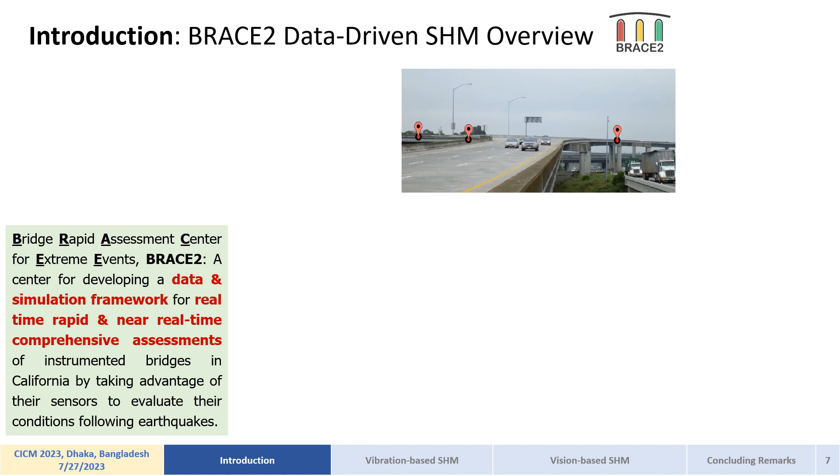BRACE2 is a Bridge Rapid Assessment Center for Extreme Events to develop a data and simulation framework for real-time rapid and near real-time comprehensive assessments of instrumented bridges in California by taking advantage of their sensors to evaluate their conditions following earthquakes. Sensors are typically accelerometers for vibration-based SHM and cameras or drones for

vision-based SHM. Upon processing, learning, and analyzing the multimodal data, where we couple physical twin with digital twin through sensor data, system identification, finite element simulation, we achieve rapid or detailed maintenance decisions.

Forming BRACE2 is motivated by the fact that in the past 20 years, about $25 million were invested by Caltrans in the California Strong Motion Instrumentation Program for bridges. BRACE2 will demonstrate that such instrumentation can evaluate the bridge conditions and help the mission of the maintenance and post-earthquake investigation team. The map shows the stations of Caltrans CSMIP on bridges.

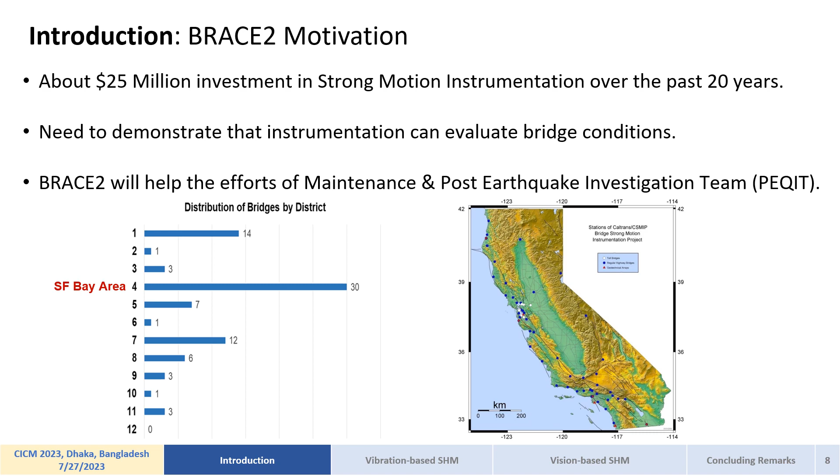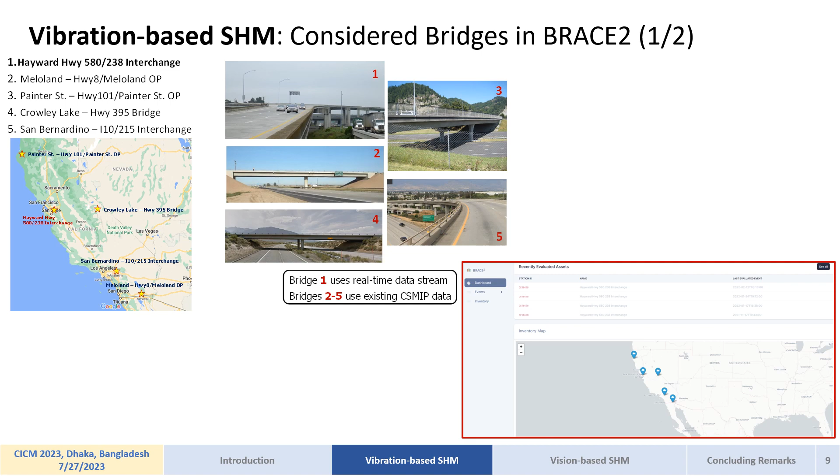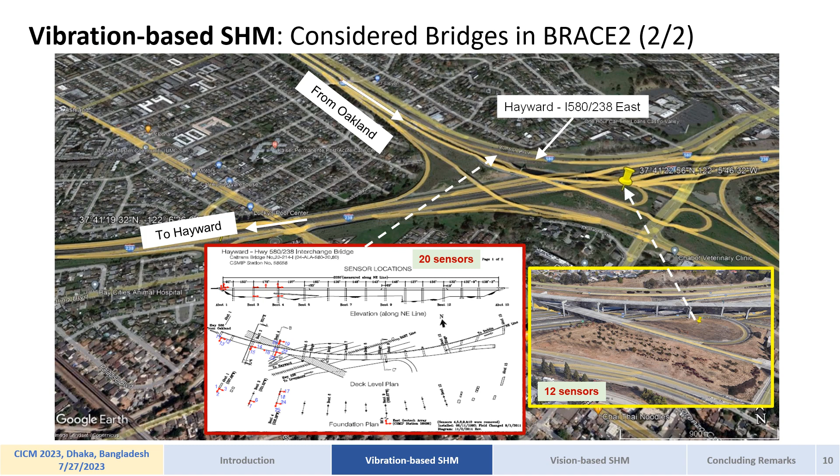about this platform. The Hayward Bridge is shown in this slide, which has 32 channels of recording, 20 on the superstructure and 12 on the East Geotechnical Array.

On a high level, the BRACE2 platform consists of a decision-making core. It receives data from the 32 channels of accelerometers through California Geological Survey real-time data streaming to the BRACE2 server for the case of Hayward Bridge.

It also has several pre-developed structural components to determine the capacity of these components, which are used for real-time damage assessment. It also has global bridge models of multi-fidelity for near real-time comprehensive assessment.

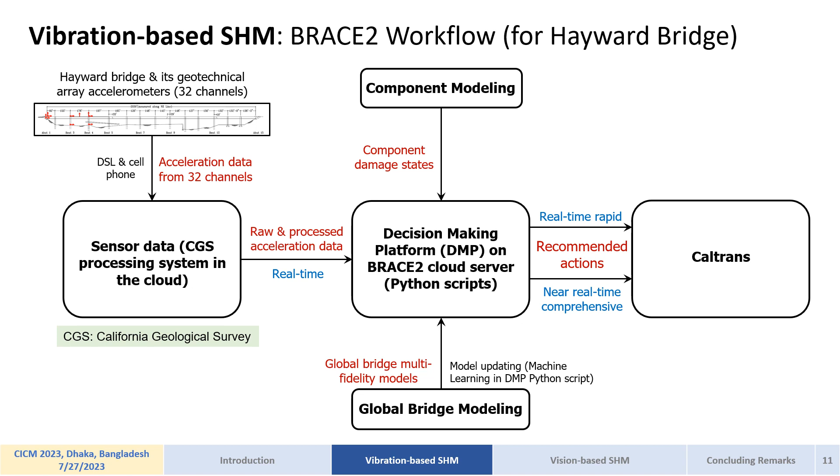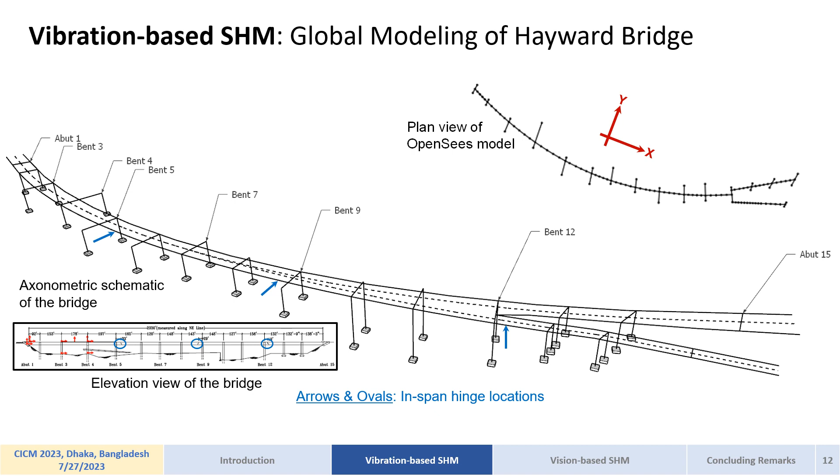This slide shows the computational model of the Hayward Bridge, which is developed in OpenSees and considers all the details of the model, including in-span hinges, abutment models, different constitutive models of columns, the bridge deck, and so on.

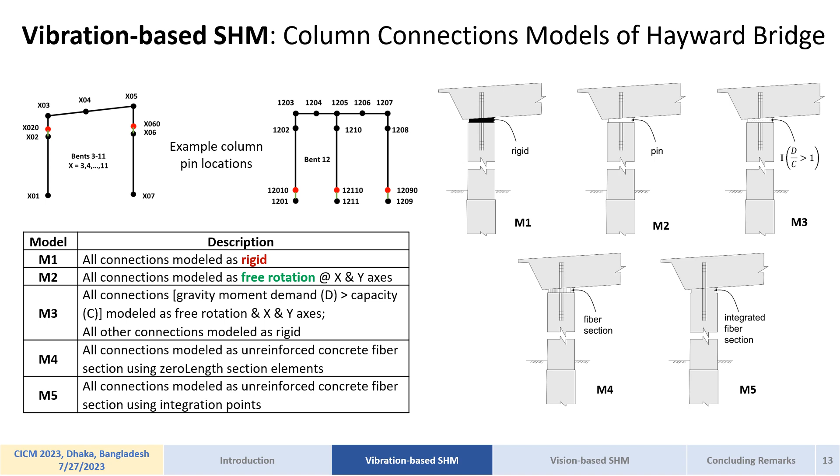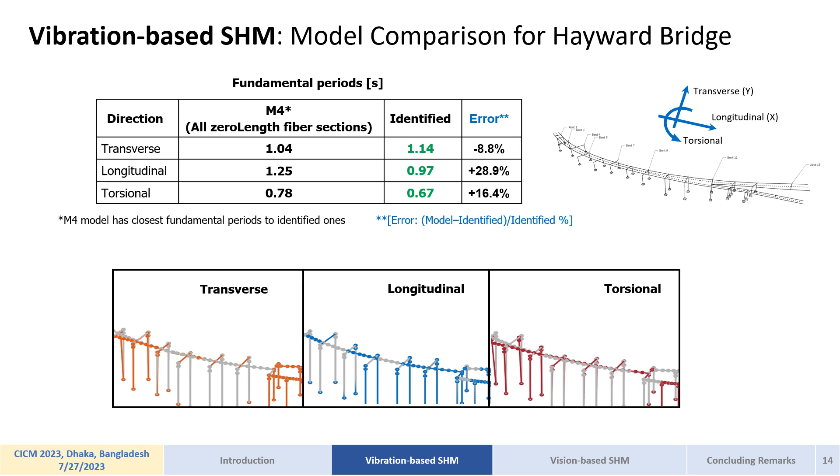Several system identification methods are implemented in the BRACE2 framework, including single input, single output, multi-input, multi-output methods, where acceleration data, recorded for the instrumented part of the bridge or simulated for the non-instrumented part of the bridge, are processed to estimate the vibration characteristics.

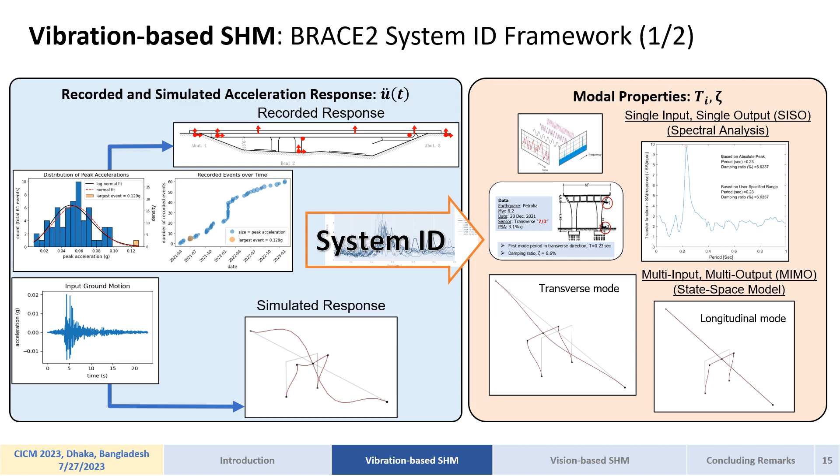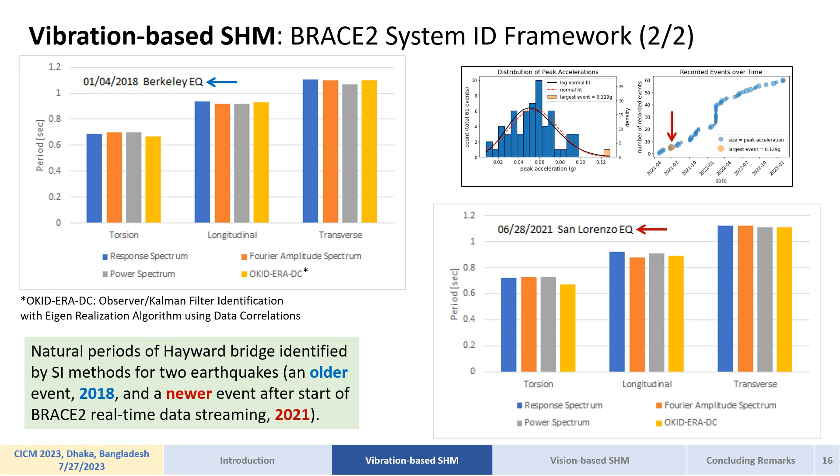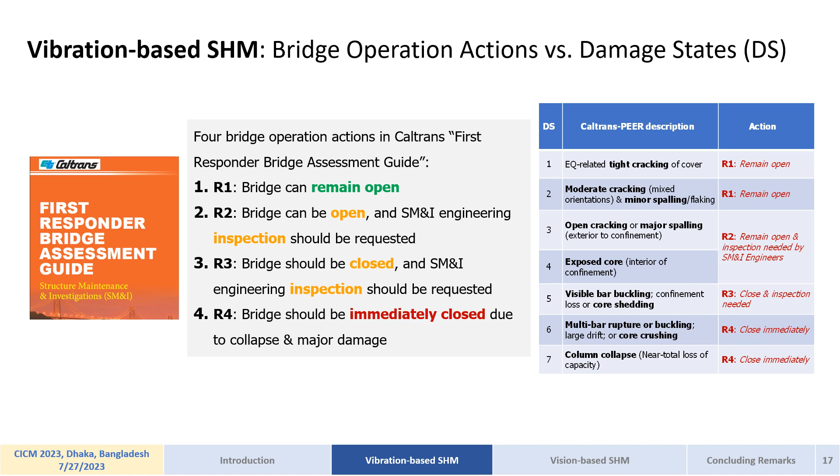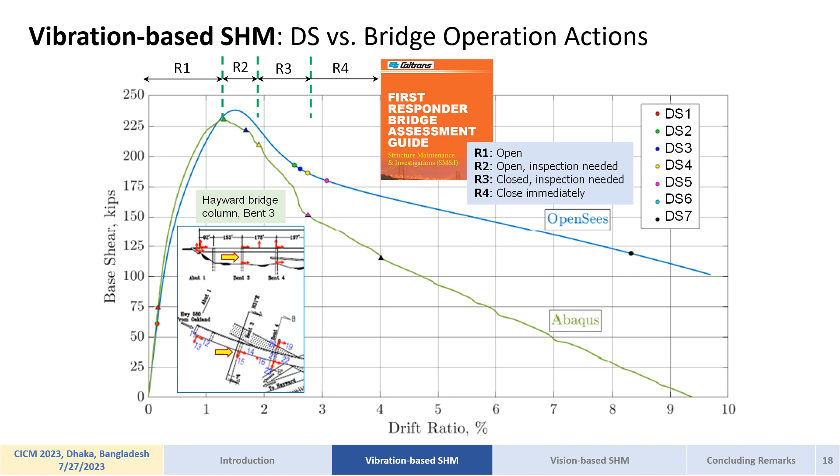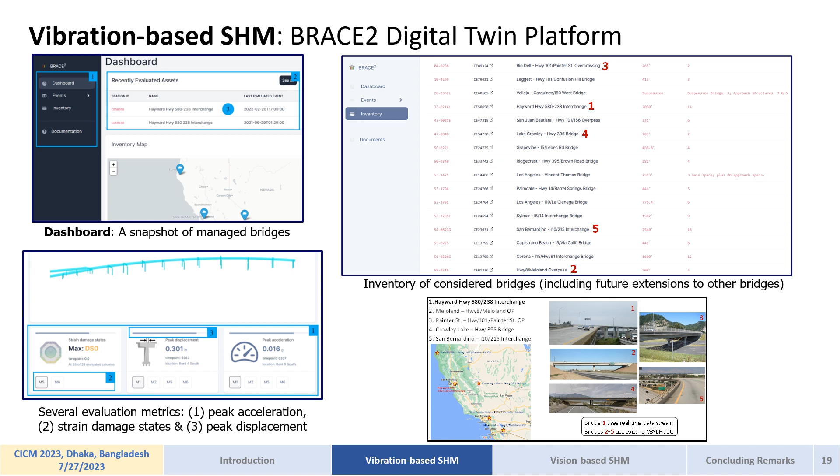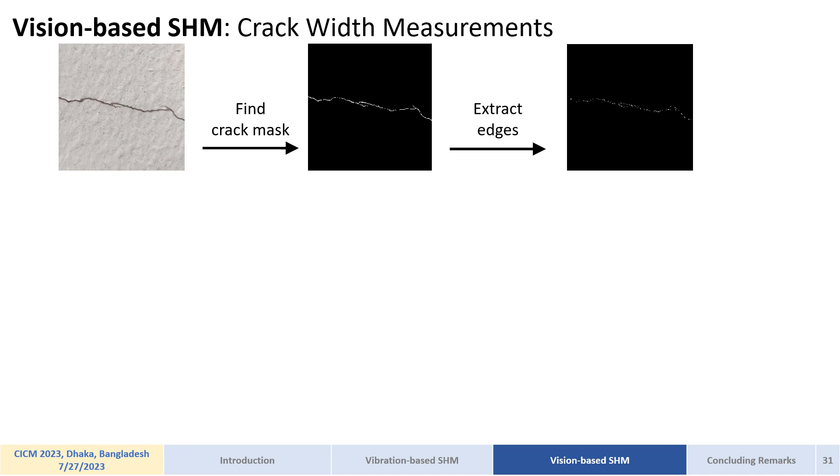To be a little more specific, here I show a picture of a crack where we find the crack mask to get rid of the background, and then we extract the crack edges. Here it's shown for a small part of the crack on the pixel level by zooming in. Then we can use this information to determine the projection angle of the maximum width of the crack, and finally conduct width and angle calculations.

In the coming slides, I compare the obtained maximum crack width D, that's shown here, with the actual crack width if it's known through the so-called recognition error.

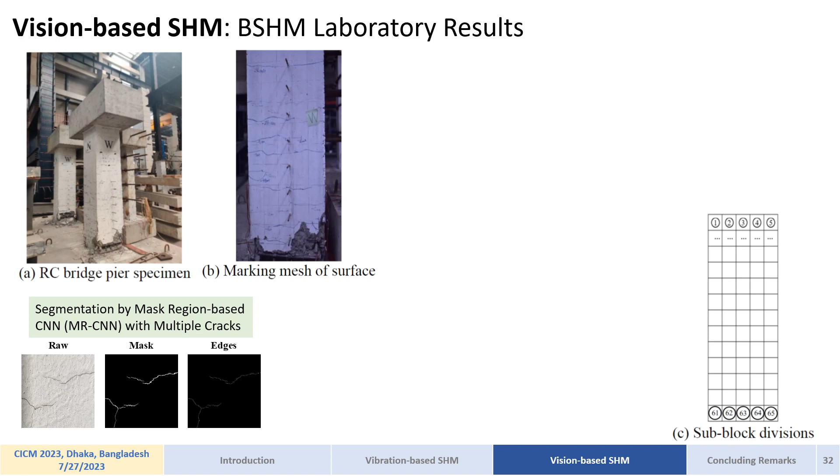This framework was applied to several laboratory bridge piers which were tested for excessive level of loading that led to damage and cracking, concrete spalling, and so on. And results were very promising qualitatively and quantitatively, with maximum recognition error of about 13% for these identified 10 cracks that you see here, and you see the recognition error of a maximum of 13%.

There are two values for cracks 8 and 9 of higher value than 13%. This is due to surface defects, not due to comparison with the actual crack width. So the surface defects led to erroneous determination of the actual crack width. And this part here of these 10 cracks correspond to these 10 cells of the grid to which the specimen was divided into.

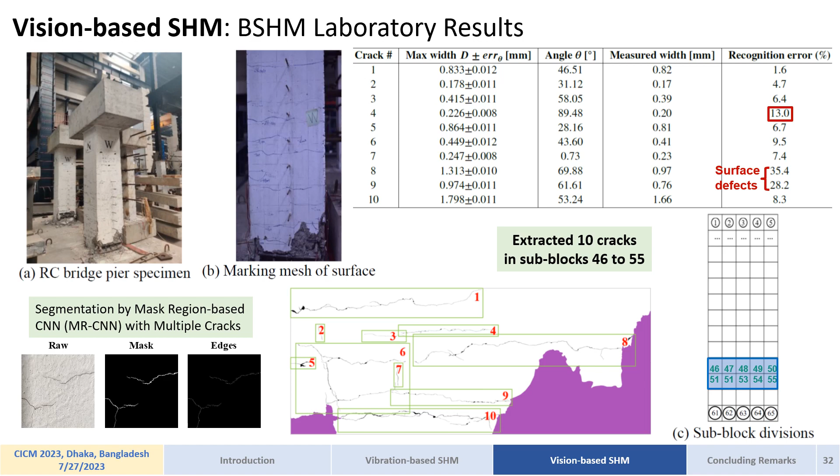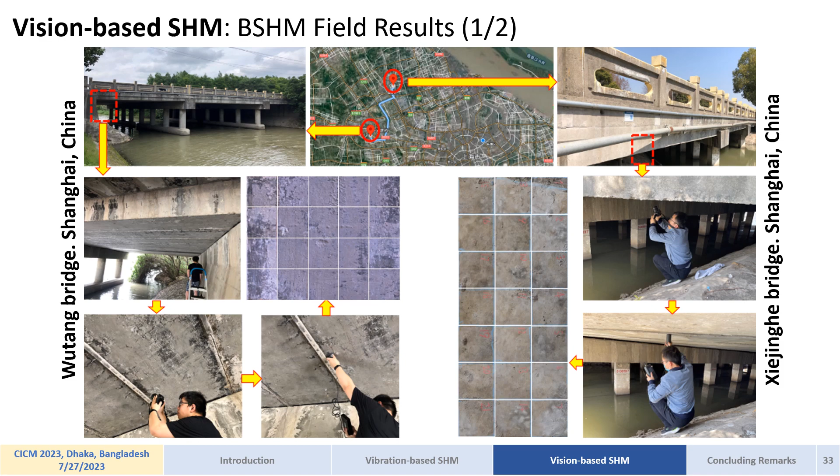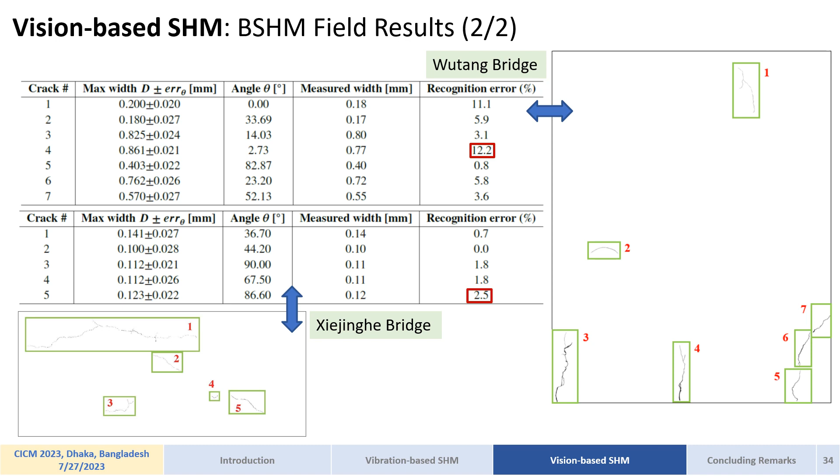Finally, we come to the concluding remarks. I can say that the objective of BRACE 2 is post-earthquake real and near real-time damage and functionality assessment of bridges with physics-based and data-driven methods using sensor data and numerical simulations. This has been achieved.

The advances and results in AI-enabled structural health monitoring show high potential of this approach in structural engineering applications, particularly with now the available open source PEER Hub ImageNet with its 8 tasks and its extended version with 10 tasks. With improved monitoring, cheaper sensors, data fusion, and machine learning, the maintenance and effective decision-making about conditions, replacement, retrofit of key elements of the built environment, whether it's bridges or buildings, can be reliably achieved.

The future research is expected to continue and to take place for early stage warning using vision and vibration-based SHM. Finally, this line of research is expected to enhance the resilience of the built environment, where rapid actions are recommended to decision makers, for example, bridge operations and maintenance or emergency responders.